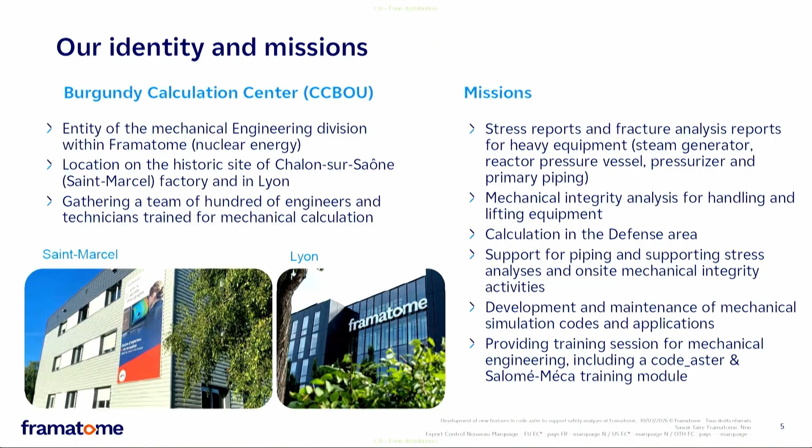And the main point here is that we are responsible for the development and maintenance of mechanical simulation codes. And also we are providing training sessions for our engineers, including a code_aster and Salome-Meca training module. So about the history of code_aster at Framatome and our partnership. We started working with code_aster in 2021. So now it's one of the key reference tools for finite elements at Framatome.

Also, we have done some developments to industrialize all the study stages for our users, to make it more user-friendly for our application. We also have done the validation of version 16 of code_aster with our own industrial test cases. It was done in 2024. And a specific point is that we have some know-how methods that we want to keep as intellectual property, so we can't share them as open source features.

So we have two types of developments that we are doing. In 2025, we signed a partnership agreement with EDF R&D to define what is going to be an open source development and what will be kept as intellectual property. And this contract, we are updating it with our new developments. Also, we are following the quality assurance of EDF R&D.

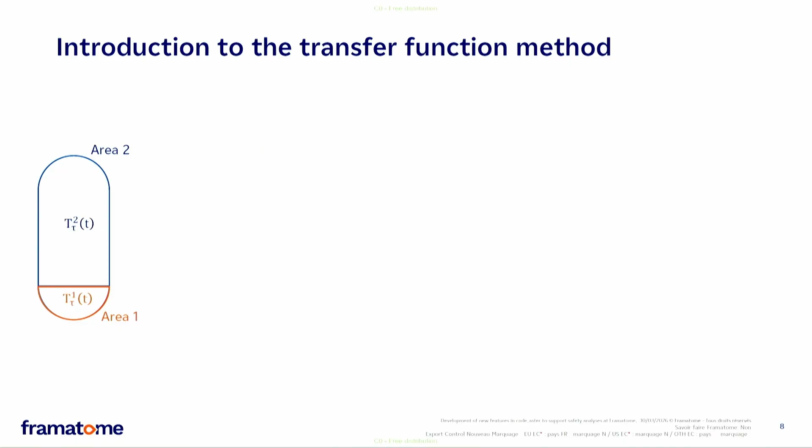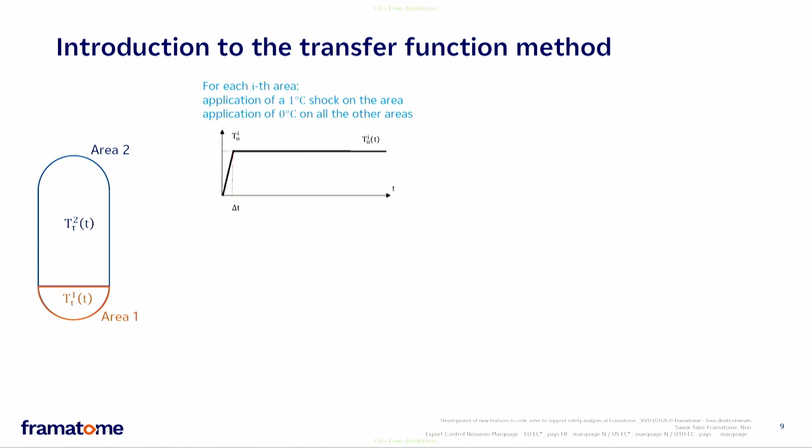So if you have a system with two areas where you want to apply two different temperatures, and you know the description of the evolution of your temperature, you can apply on each area a 1 degree unitary shock while maintaining 0 degrees on the other area, then compute the thermomechanical response to this unitary shock and the derivative of it. When you know the real description of temperatures that you want, you can obtain it with the convolution product.

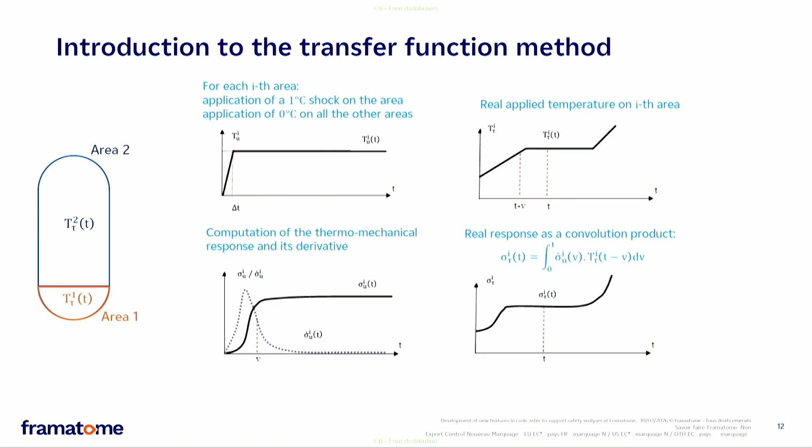So in this example, there are only 2 areas, but if you have, for example, 10 areas, you just need 2 finite element computations for each area, and you can have hundreds of thermomechanical responses. The hypothesis behind it is that it only works in linear elasticity. For example, the number of transients we are interested in at Framatome in our studies can go up to 200. So it's a lot of gain in time and in resources.

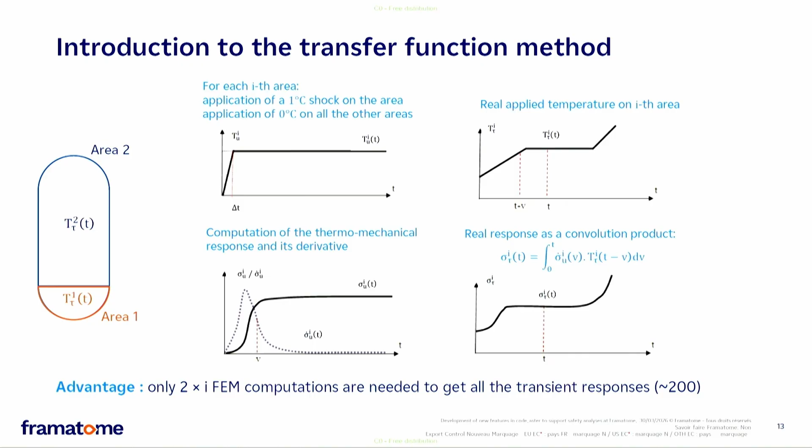For this specific method, we need to perform multiple thermal and thermomechanical simulations. So we have 2 simulations for each area. And for the user, it was a bit of a limitation because we have to repeat the same operation a lot of times, with the thermal and the thermomechanical for each area.

And that makes a lot of results to handle, because each simulation is for one area and it's one result that you have to keep track of, one concept. And also for thermomechanical analysis, you have to define a new material with a new control variable each time you want to do the calculation.

And also, because of the specific method where you want to apply 1 degree somewhere and 0 degree on all the other areas, you have to be careful and not make mistakes and forget one area. And so for the user, it's a lot of combinations of loading to be sure of.

We have developed a command named CALC_THER_MULT, which is already available in version 17, which allows you, with common thermal boundary conditions, to define different load cases where you just give the thermal loading you want for each case, and it's only one command.

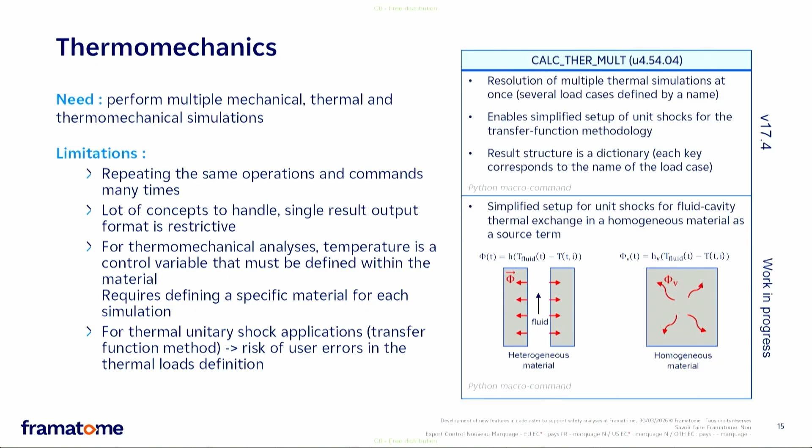It's by using different source terms to diffuse some heat inside the system. And we want to make it simpler with a specific keyword in this command instead of defining a lot of loads. And all of this has been made as a Python macro command. So it's quite easy, let's say, for someone who knows Python to implement this command.

Another development that we have made is similar in a way to what I have just presented. It's CALC_MECA_MULT, and it allows the resolution of multiple thermomechanical simulations at once. So you just give the command the common boundary conditions for all your cases, and for each case keyword, you just give the thermal evolution from which you want the thermomechanical answer.

So with one command, you can have 10 thermomechanical answers to the same mechanical problem, but with 10 different temperature fields. Also, if you directly give the concept that is the result of CALC_THER_MULT, which already contains, let's say, 10 load cases, it will automatically give the thermomechanical response to the 10 load cases.

And it will keep track of the names, and you will have one result dictionary at the end. This is also available in version 17. And what we are working on at the moment is to extend this command to mechanical-only loads, as an alternative to what already exists in MACRO_ELAS_MULT, but the result would be a dictionary in the same way. So you can have in the same concept mechanical answers and thermomechanical answers, with no limit on the number of results.

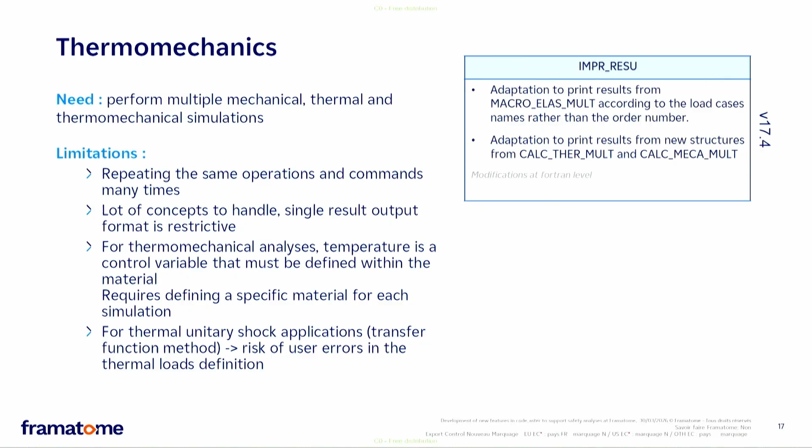And also you have the same format for both of them, because MACRO_ELAS_MULT at the moment doesn't work this way. We have also made a small development to adapt the output of MACRO_ELAS_MULT, because when you want to print a result from MACRO_ELAS_MULT, it's sorted by the order number of the results. For example, your first result will be at order 1 and the second at order 2, but it will be considered as one result with different order numbers.

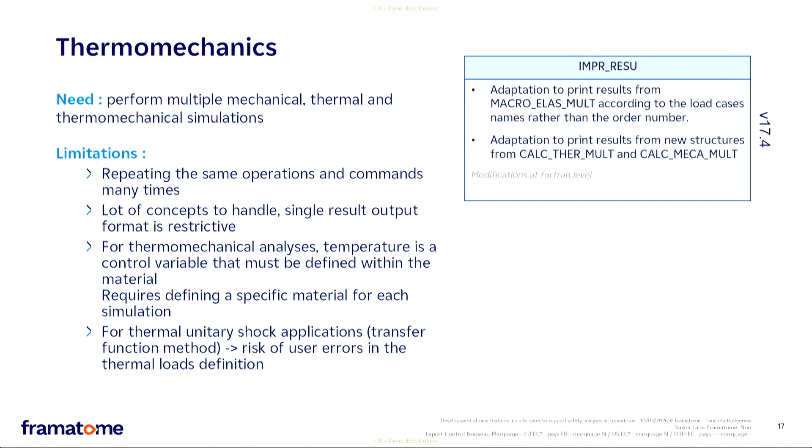And we have done this work to be able to have different results, all the results for all our cases. And also, we have modified IMPR_RESU to be able to print a result from CALC_THER_MULT and CALC_MECA_MULT.

So now I will talk to you about how we choose the time steps inside the unitary thermal shock that Gaëtan told you about before. These time steps are computed thanks to an external Code_Aster command, but it looks like a real Code_Aster command. This command is called TER_INSTANT_COUPE, and it's Framatome IP.

And the advantage of doing that is that we use an external catalog that can check the syntax exactly the same as it could be done for an actual Code_Aster command. And inside this command, we do thermal and thermomechanical computation with Code_Aster on 1D lines in order to adapt the time stepping and have an adapted one.

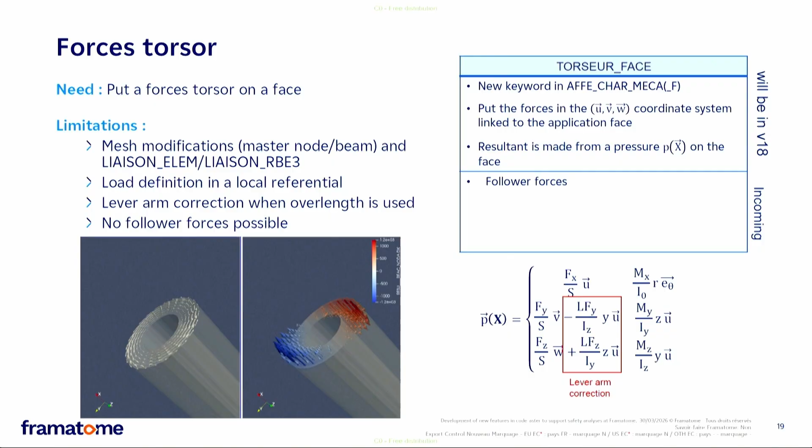You can put the forces in the local coordinate system, and the resultant, so the forces are made from a local pressure. The formulas are given here, and they are represented on these figures. So here is for a torque, and here for a bending moment. On the right, you have the syntax of the command.

And we can say on this development that it was not so complicated. This was our first real development in the Fortran of Code_Aster, for us. Thanks to the support of EDF, they clarified to us how to do it. The elementary computations of the skin elements are very accessible, readable, I thought. And the Fortran of Code_Aster is not so complicated, except when you have to deal with the memory manager.

So the last subject is the result extraction for our safety analysis. Our safety analyses are based on extraction on 1D lines that we call path lines. So our need is to extract results on these unidimensional lines, and we have to be sure that the extremities of the lines are on the skin of the mesh. So in order to do that, we've introduced in Code_Aster version 17 two commands, CREA_COUPE and EXTR_COUPE. The first one is necessary for computing the intersection between a line and the skin of the mesh.

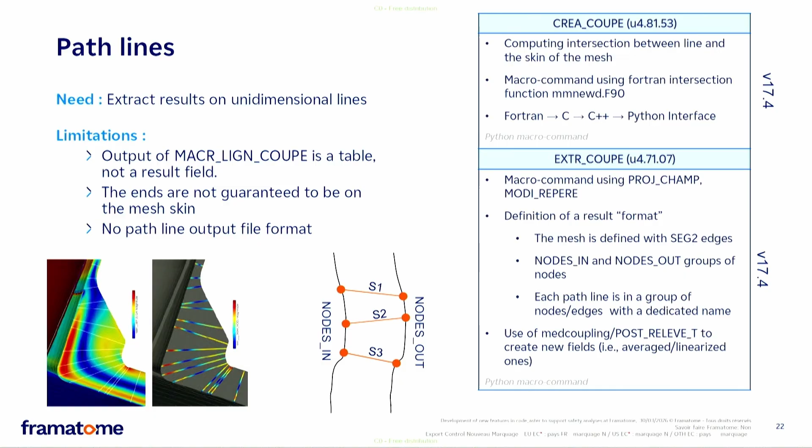It's a macro command in Python, but a Python interface of a Fortran function has been done. So we made the interface between Fortran, C, C++, and Python. The second command actually does the real extraction on the path made in the previous command. It's a macro command too that uses PROJ_CHAMP, MODI_REPERE, and so on, and it defines a result format adapted to paths. The mesh is defined on SEG2 edges. There is a group of nodes in, nodes out, and each path line is in a group.

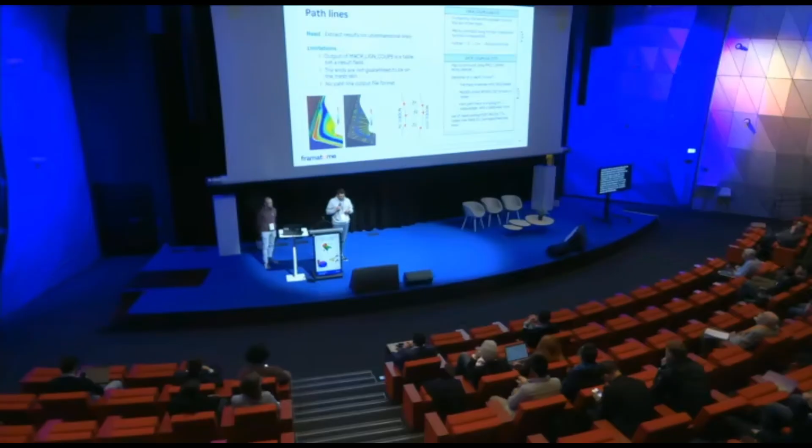And for other things, we use MEDCoupling and POST_RELEVE_T to do stuff with the fields. And for defining all that in a graphical interface, we are developing a graphical interface called Kamino. It is an ergonomic platform to generate path lines, and it allows us to accelerate the creation of paths, because in our studies we can have many paths, and it could be complicated to create all that stuff. A first version is expected in 2027.

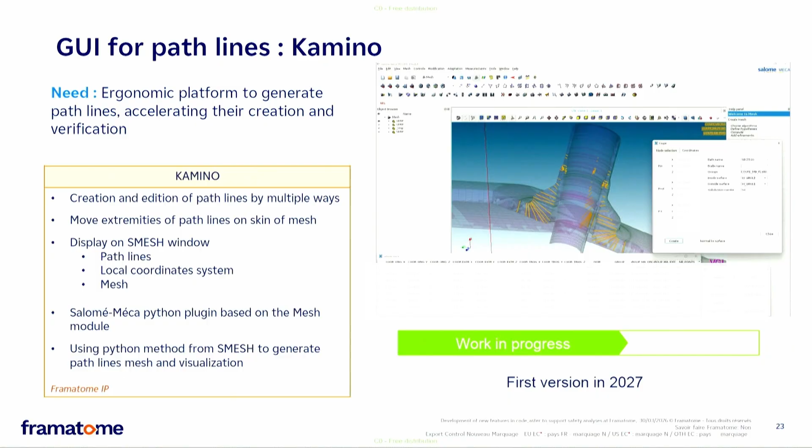Second point is the development of a new tool for combining all our unitary shocks with the transfer function methodologies. It's the first slide that Gaëtan presented you before. And in another post-processing tool that we have for fatigue analysis, we use MED directly to read our RMED files, and it works and it is used in industrial studies.